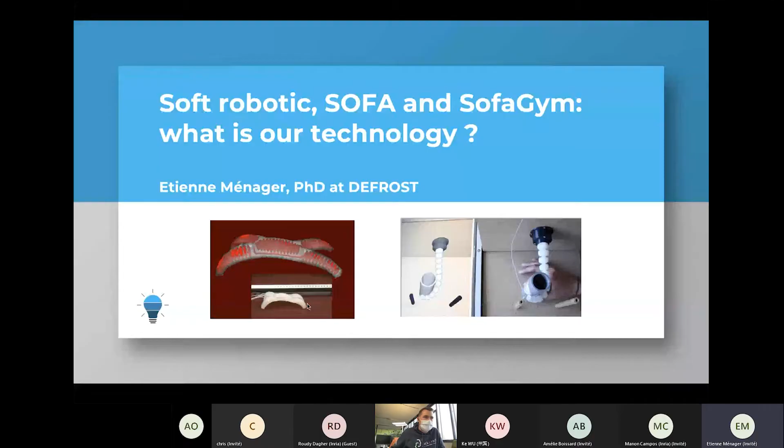Je suis Étienne Ménager, je suis doctorant à l'équipe Defrost et aujourd'hui, je vais vous parler de soft robotique, de SOFA et de SofaGym. Ça veut dire plutôt l'aspect simulation des technologies qu'on développe à Defrost.

La première question qu'on peut se poser, c'est qu'est-ce que c'est la robotique et quels sont les challenges de la soft robotique? Pour ce faire, on va essayer de comparer un petit peu les points forts de la robotique classique et les points forts de la robotique déformable.

Lorsqu'on regarde des robots classiques, on se rend compte que la grande difficulté qu'on a, c'est avec les interactions avec l'environnement. Par exemple, si on a un environnement qui est fragile, les parties rigides de notre robot peuvent endommager cet environnement, et on voit qu'on a des limitations au niveau de l'interaction entre le robot et l'environnement.

Le point fort des robots classiques, c'est qu'il est facile de les modéliser, donc facile de les contrôler. D'un autre côté, on a les robots déformables qui, eux, sont très forts en tout ce qui est interaction. Le corps souple du robot peut rentrer en contact avec un environnement, par exemple, qui est fragile sans le détériorer, mais il est plus difficile de modéliser ce type de robot.

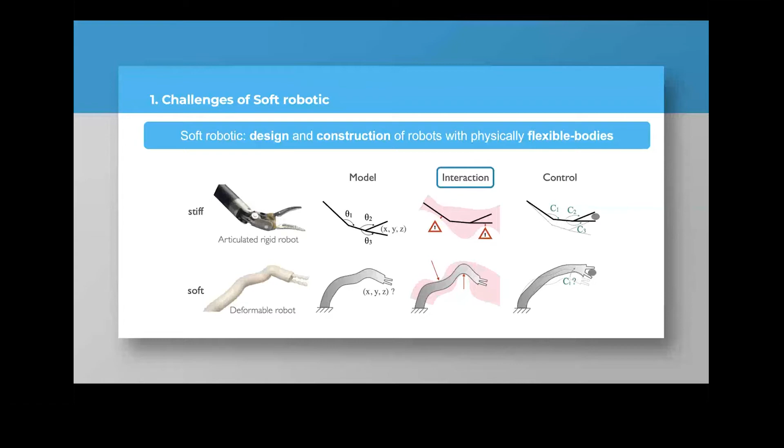Chez Defrost, on s'intéresse à la thématique des robots déformables et on s'intéresse à la modélisation et au contrôle à travers la simulation. Dans une simulation, on a un robot virtuel qui interagit avec un environnement. Et en fait, les outils de simulation, ça nous permet d'avoir des simulations numériques qui sont précises.

Ça veut dire qu'on va pouvoir facilement et avec précision simuler la déformation du robot. Et on va pouvoir également simuler les interactions entre le robot et un environnement qui est déformable ou qui est rigide. La simulation permet de préserver des ressources.

Ça veut dire qu'en fait, on va avoir plusieurs avantages à faire les calculs en simulation avant de passer sur des robots réels. Par exemple, on va avoir l'avantage de la rapidité, puisqu'on a des simulations qui tournent plus vite que le temps réel. Donc on peut faire plein de choses en simulation qui prendraient beaucoup plus de temps avec un robot réel.

On va pouvoir limiter les coûts de développement, puisqu'en fait, on va pouvoir tester nos idées en simulation, tester différentes formes, différents actionnements, etc., avant de devoir les fabriquer réellement et de les mettre sur un robot réel. C'est-à-dire qu'on peut faire nos essais-erreurs en simulation. On a juste besoin d'un ordinateur et de notre logiciel de simulation. Et après, une fois qu'on a tout travaillé en simulation, on peut passer sur un robot réel et donc on limite le coût de développement sur un robot réel.

On peut également faire du prototypage virtuel, et donc ça permet, par exemple, de tester les différentes idées qu'on peut avoir sur des robots souples. Et on peut également tester nos robots quand ce n'est pas possible de le faire en réalité. Donc c'est surtout dans des questions médicales où parfois on veut entraîner un robot, par exemple, à naviguer dans des artères, et donc on ne peut pas le faire sur des patients avec un robot réel.

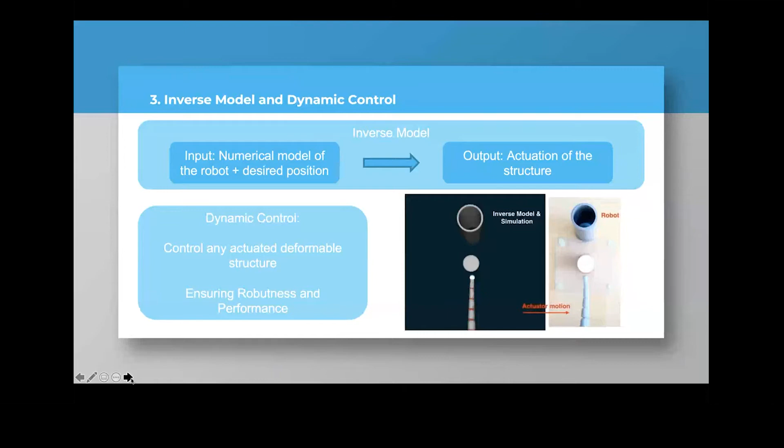On va pouvoir faire du contrôle dynamique, c'est-à-dire que pour n'importe quelle structure déformable qui est actionnée, on va pouvoir trouver un contrôle pour atteindre une certaine position en assurant des notions de robustesse et de performance.

Par exemple, ici, on a un robot qui s'appelle le robot trunk, donc c'est une sorte de trompe qui peut se déplacer, et l'objectif, c'est de suivre la petite boule blanche. À gauche, on est en simulation, et à droite, on a un robot réel. On voit que le robot suit bien la trajectoire donnée par l'objectif, il peut même interagir avec des obstacles. Et ce qui est bien, c'est que tout ce qu'on fait en simulation, on peut le transférer sur le robot réel, et on voit qu'on a le même comportement, que ce soit en simulation ou avec le robot réel.

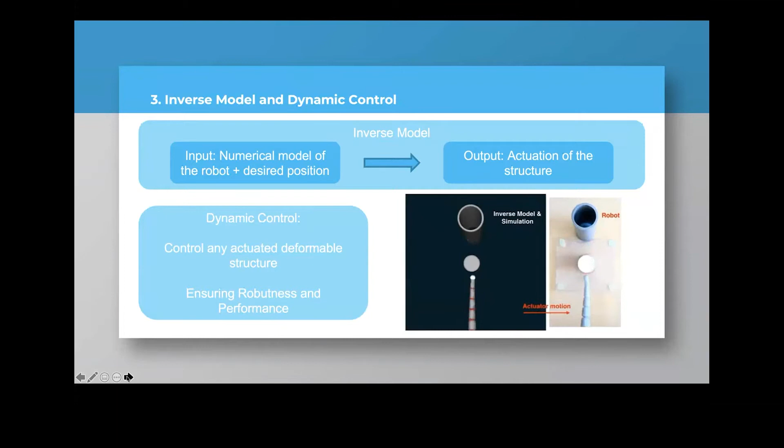Donc, j'ai présenté différentes choses, c'est-à-dire la simulation, tout ce qui était contrôle et inverse. Et ce qui est intéressant, c'est que ces outils ne servent pas seulement au moment où on est derrière notre ordinateur, mais ils peuvent servir aussi lorsqu'on a notre robot réel pour faire différentes tâches. C'est-à-dire qu'ils servent à la fois pour le design du robot, mais aussi pour l'utilisation du robot.

Par design, par exemple, on peut imaginer qu'avec la simulation, on cherche la forme du robot, la taille du robot, on cherche les différentes parties du robot pour atteindre certaines performances. On peut chercher aussi l'espace de travail avec notre modèle inverse, on peut valider des comportements, on peut faire du test, on peut chercher des lois de contrôle.

Et une fois qu'on a designé notre robot, on peut construire le robot et continuer à utiliser les outils de simulation ou de modèle inverse, par exemple, pour nous aider lors de l'implémentation de la commande, pour nous aider à trouver des trajectoires qui sont atteignables par le robot, ou pour estimer la position ou les forces qui s'appliquent sur le robot. Donc, on a ces différents outils.

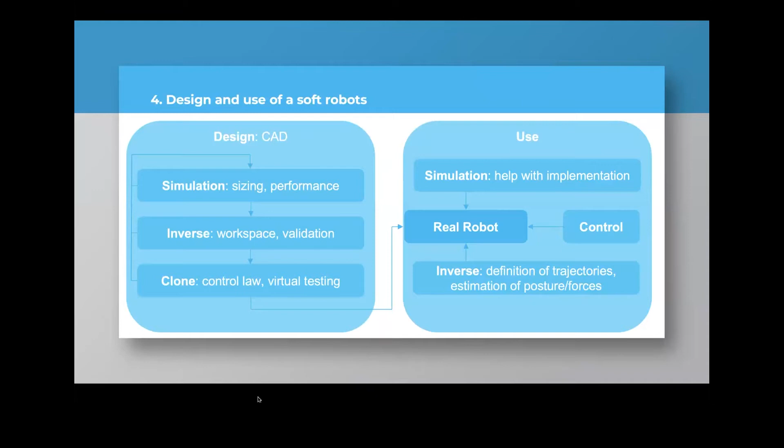Et une application qu'on vient de mettre en place à Defrost, c'est SofaGym, donc qui permet de faire le lien entre intelligence artificielle et robotique. Je présente rapidement deux exemples.

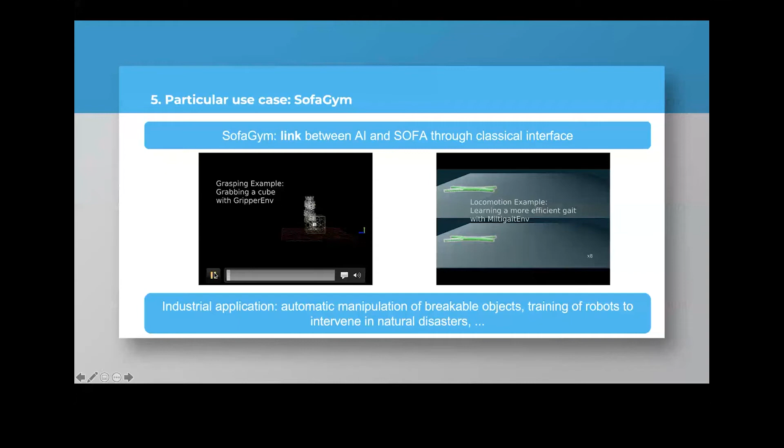Le premier, c'est un robot gripper. Le but de ce robot, c'est d'attraper des objets et de les soulever. Et on voit que le robot apprend par lui-même à réaliser cette tâche. C'est-à-dire qu'on a notre robot, on a zéro commande, et on lui dit juste attrape le cube et mets-le à une certaine hauteur. Et petit à petit, le robot apprend par lui-même à résoudre cette tâche.

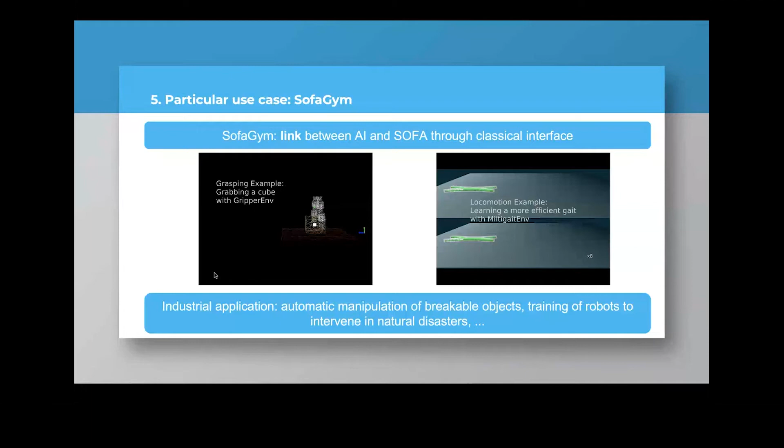Le deuxième exemple, c'est un exemple de locomotion. En haut, on a une commande qu'on a définie à la main. On veut que le robot se déplace au maximum horizontal. On voit qu'on peut faire une commande à la main, mais elle n'est pas forcément optimale. Et en fait, le but aussi de l'intelligence artificielle, ça peut être de chercher une commande optimale. Et donc, on voit ici que la commande qu'on a appris, elle permet d'aller beaucoup plus vite pour se déplacer au max X. Donc ici, c'est deux exemples un peu jouets, disons, qu'on a dans l'équipe, mais on peut imaginer différentes applications industrielles.

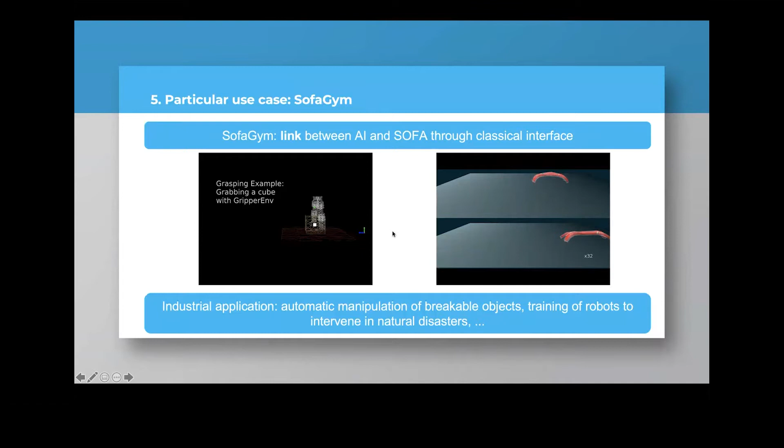Par exemple, la manipulation automatique d'objets fragiles, puisqu'on a vu que les robots souples sont très bien designés pour interagir avec des environnements qui sont fragiles, qui sont souples, ou comme par exemple les tissus humains. Donc, on peut imaginer un robot qui va apprendre par lui-même à manipuler ce type d'objet.

On peut également imaginer la locomotion d'un robot qui va apprendre par lui-même à intervenir lors de catastrophes naturelles. Par exemple, si on a un tremblement de terre avec un bâtiment qui s'est effondré, on peut avoir un robot souple qui peut se faufiler dans les débris et intervenir pour différentes tâches qu'on lui a fixées.

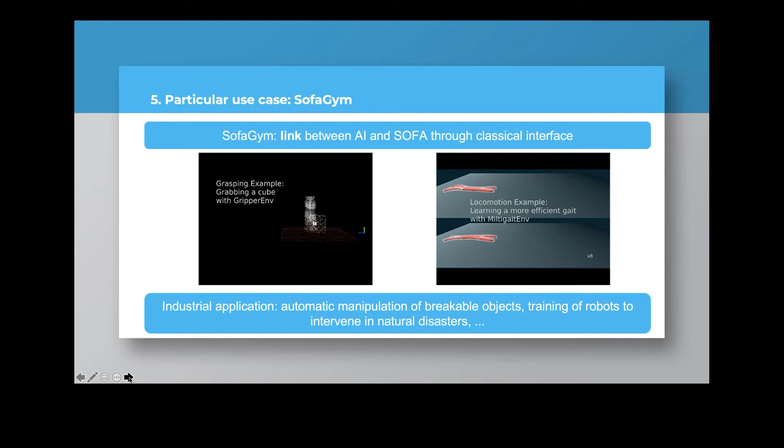Un autre exemple, c'est le transfert d'apprentissage. Ça veut dire qu'on peut faire du design et du contrôle en simulation à l'aide de l'intelligence artificielle, et ensuite appliquer ce contrôle sur un objet réel.

Ici, on a un labyrinthe qu'on veut chercher à résoudre avec l'intelligence artificielle, et ce labyrinthe, il est actionné par un robot souple, et donc le robot apprend par lui-même à résoudre ce labyrinthe. Dans notre exemple, on veut amener la balle qui est en orange ici, dans le coin supérieur droit.

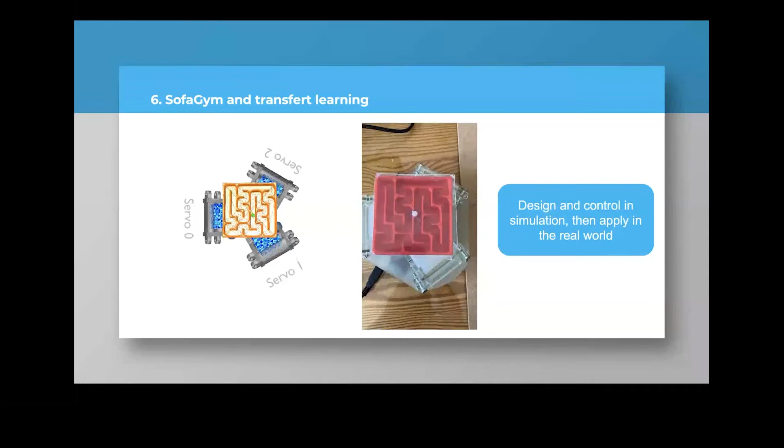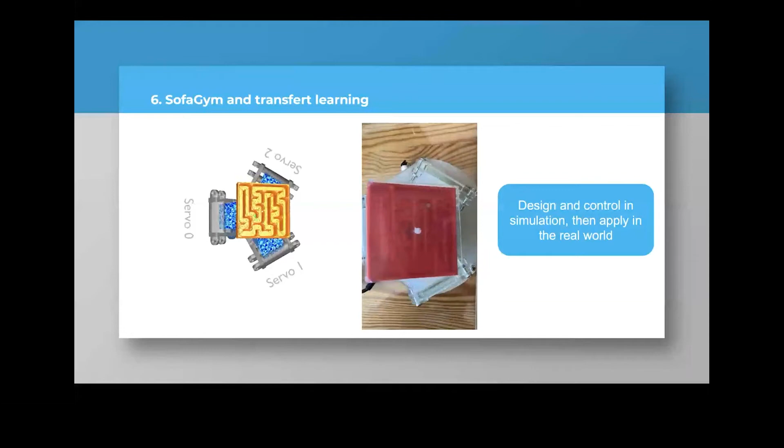On peut se rendre compte que lorsqu'on applique la stratégie qu'on a trouvée en simulation, on peut résoudre également le labyrinthe réel. Donc on voit ici qu'on est en boucle ouverte, ça veut dire qu'on n'a pas de retour de la réalité. Donc on peut avoir une petite différence entre simulation et réalité, mais il est tout à fait possible d'imaginer faire le contrôle en boucle fermée, c'est-à-dire avoir un retour du robot réel.

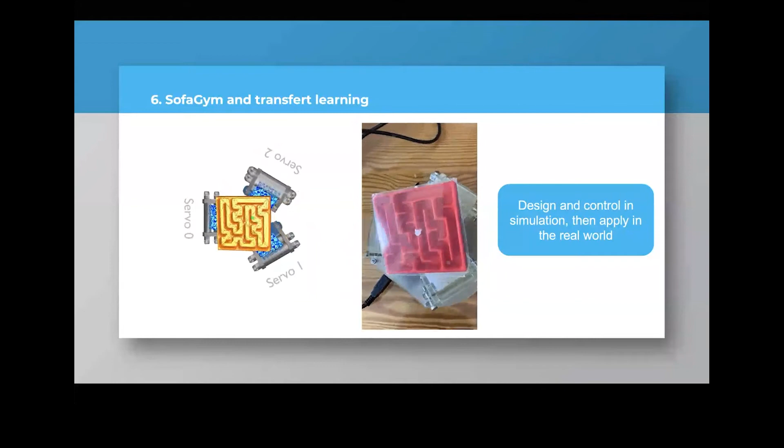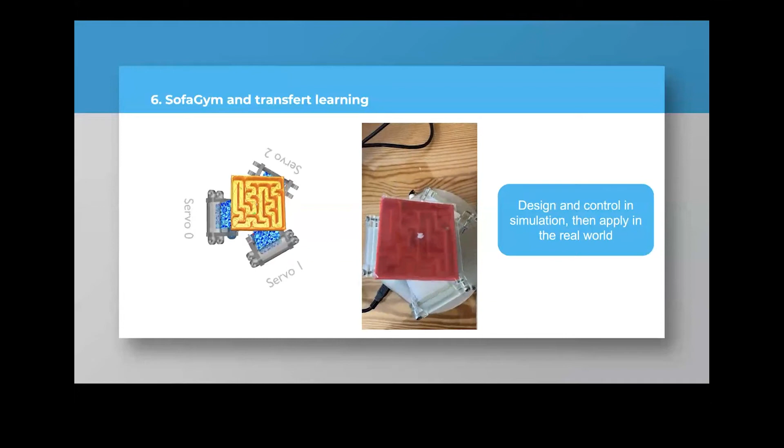Là on voit que petit à petit, on arrive à résoudre notre labyrinthe et on apprend à amener, par exemple, dans le coin supérieur droit. Donc là, par exemple, on a vu une différence entre simulation et réalité, mais finalement on arrive à atteindre la position finale.

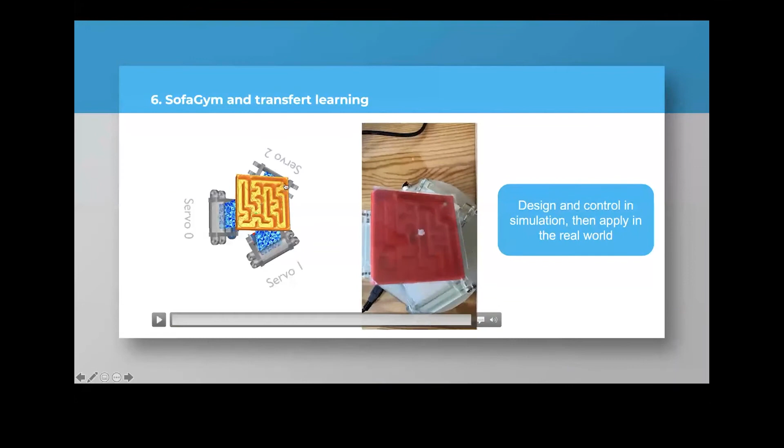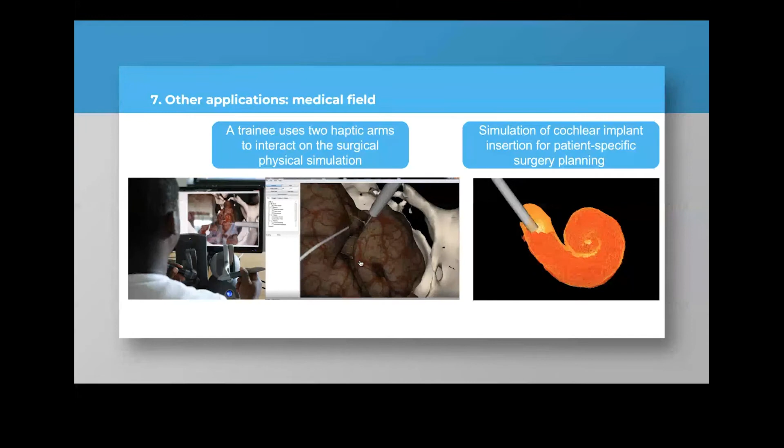Un autre exemple qui n'a rien à voir avec l'intelligence artificielle, mais qui est un bon exemple d'application de la simulation, c'est l'apprentissage médical. Ici on a quelqu'un qui apprend à faire des opérations à l'aide de deux interfaces haptiques. Il va contrôler deux outils dans la simulation qui interagissent avec des organes. Et si on a une simulation qui est fidèle, ce qui est plutôt le cas avec SOFA, ça permet d'avoir un bon taux de feedbacks qui sont transmis à l'apprenant via des interfaces haptiques. Et donc on peut s'entraîner sur des opérations sans avoir besoin d'avoir du matériau organique en face de soi.

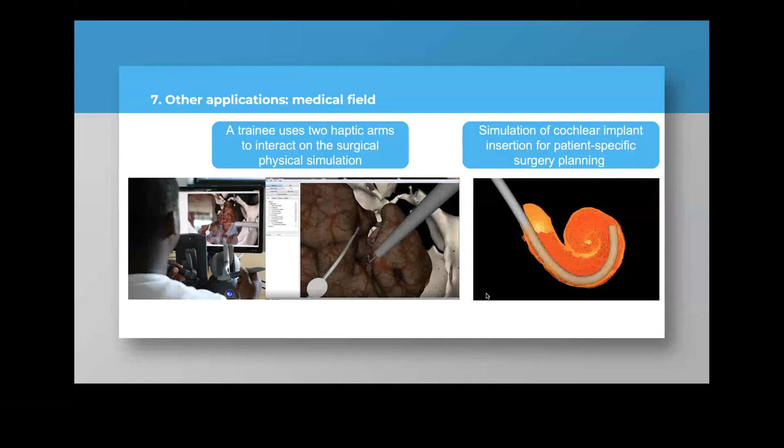Un autre exemple, c'est le planning d'opération. Ici on a l'implant cochléaire, donc c'est une opération qui vise à amener un tube dans l'oreille. Et du coup on peut imaginer prévoir l'opération en simulation avant de la réaliser en réalité. C'est un peu tout pour moi sur cette question.

Mais je voulais conclure en disant pourquoi choisir SOFA et la soft robotique. C'est parce qu'il y a beaucoup d'applications dans de nombreux domaines : on a vu le domaine médical, la locomotion, la manipulation, l'apprentissage. Ça peut être aussi le gaming, si on veut par exemple avoir une interface fidèle physiquement. La deuxième raison, c'est parce qu'on a des outils qui sont fonctionnels et open source, c'est-à-dire qu'on a une grande communauté. S'il y a le moindre problème, on a toujours des solutions et tout est gratuit.

Et un point qui est intéressant, c'est qu'on passe du monde numérique à la réalité avec des robots qui peuvent interagir avec le monde extérieur. Merci pour votre attention.

Juste une question, par exemple, sur le robot que vous avez créé qui permet de résoudre le labyrinthe. J'imagine que le robot doit s'entraîner pour trouver une solution. Et est-ce que c'est long, et combien de temps ça prend à peu près selon la complexité du problème que vous avez ? Alors là, on a utilisé des techniques de planning.

Donc c'est plutôt court parce qu'en fait on utilise la simulation comme modèle du monde extérieur. Du coup là, c'est pas très long pour apprendre ça. Et la chose qu'on a fait avec le labyrinthe, c'est qu'on a couplé à la fois intelligence artificielle et les outils inverses qu'on a avec l'équipe Defrost. C'est-à-dire qu'en fait on va juste chercher à trouver l'orientation du labyrinthe qui permet de résoudre petit à petit le labyrinthe. Et après, à partir de cette orientation, on l'utilise comme commande d'un modèle inverse qui permet de trouver la commande de moteur qui nous permet d'avoir ces orientations. Donc c'est pas très long parce qu'on a un espace réduit de paramètres.

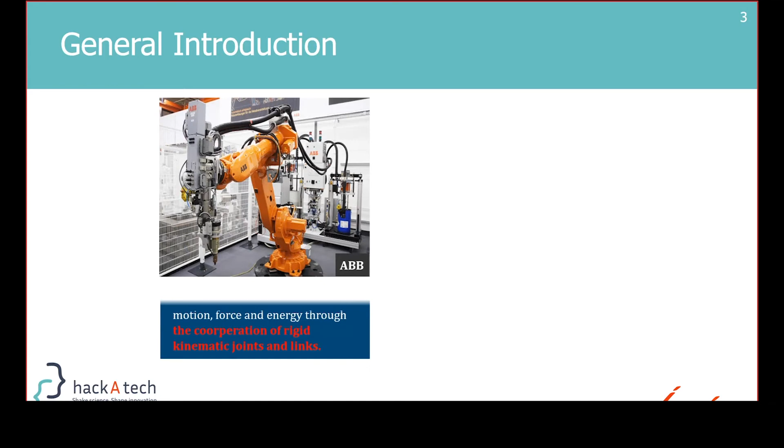First of all, I will briefly introduce you to the concept of robots and their classification. We've got the conventional rigid robots, this is the rigid arm robot from ABB, a very famous robots company. This type of robot can transfer motion, force, and energy through the cooperation of rigid kinematic joints and links. They've got high speed and accuracy, high stiffness for load bearing, and they work well in highly structured work environments.

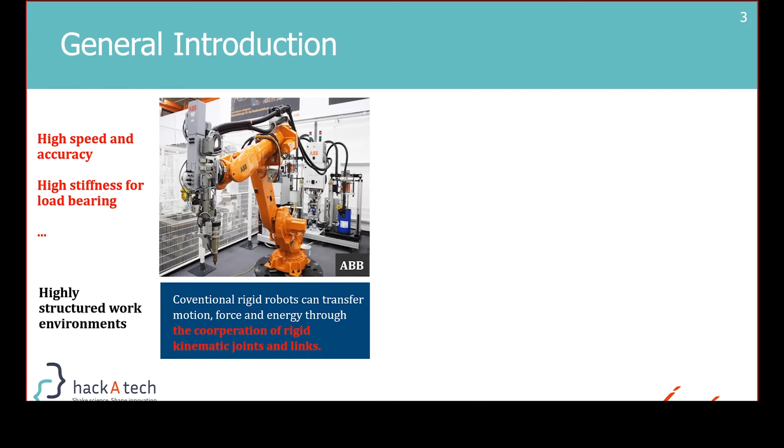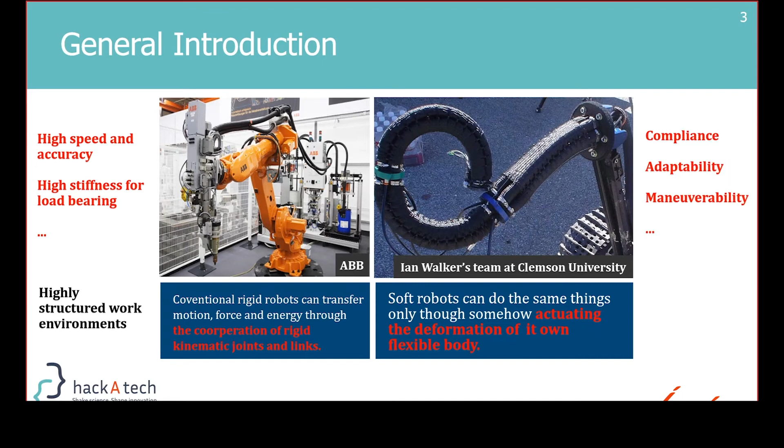And also we've got the soft robots, or you can call them continuum robots, like the one I'm showing you on the right-hand side. This is a soft trunk robot from Ian Walker's team at Clemson University. They can do the same thing, transfer motion, force, energy, but only through actuating the deformation of its own flexible body. This type of robot has compliance, adaptability to unknown environments, and maneuverability, and they are more suitable for unknown environments or scenarios where safe human-robot interaction is needed.

For the moment, in the field of soft robotics, we mainly have three challenges here. The first one is they are very hard to model, they are very hard to control. The second one is they normally move slowly, and the motion of them is not very accurate. The third one is they are sometimes too soft to bear or resist any mechanical disturbances.

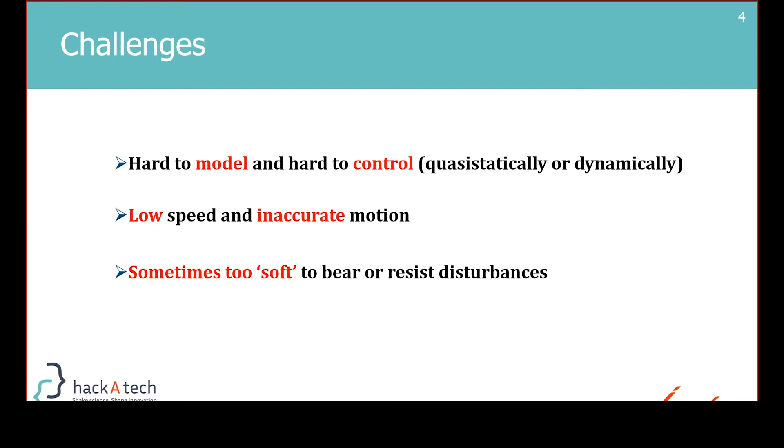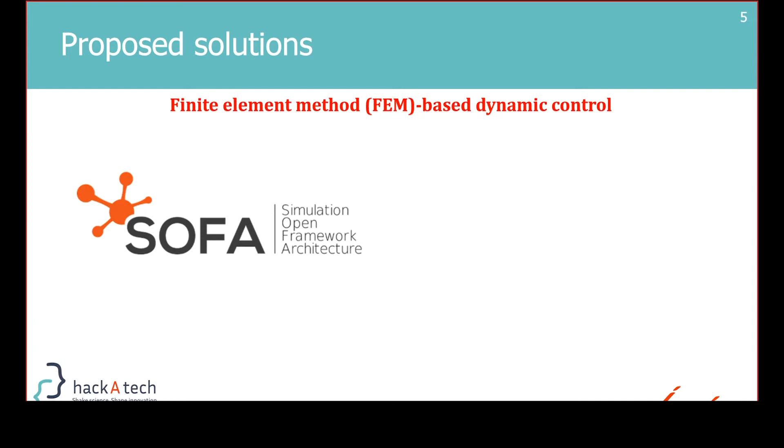So in terms of these challenges, we've got some solutions. In our team, we have an open source simulation software called SOFA, which is dedicated to modeling deformable bodies using finite element method. In my work, I use SOFA to model the studied trunk robot, and based on the model, we developed a FEM-based controller to achieve dynamic control. I'm going to show you the video.

The first part is trajectory tracking using the dynamic controller. You can see the end effector of the trunk is tracking a sine function here in the space.

The second part is about the robustness analysis under temporary disturbance. Actually, the trunk is disturbed by a pen. You can see the trunk can stably trace back to the trajectory, and it works well.

The third part is also robustness analysis, but under permanent disturbance. The trunk is actually carrying an extra piece of rubber on its body, and you can tell it also works well in this case.

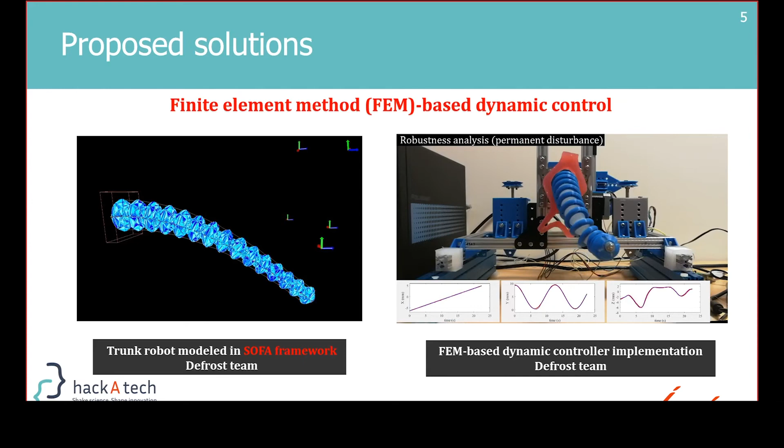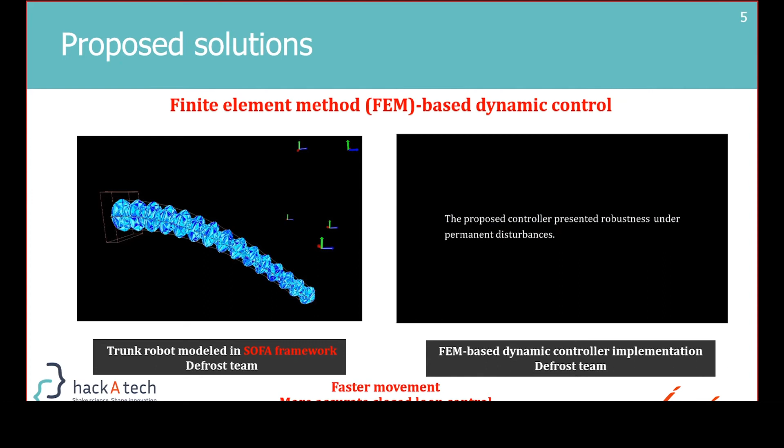So using this proposed method, we can achieve faster movement and more accurate closed-loop control. So in terms of...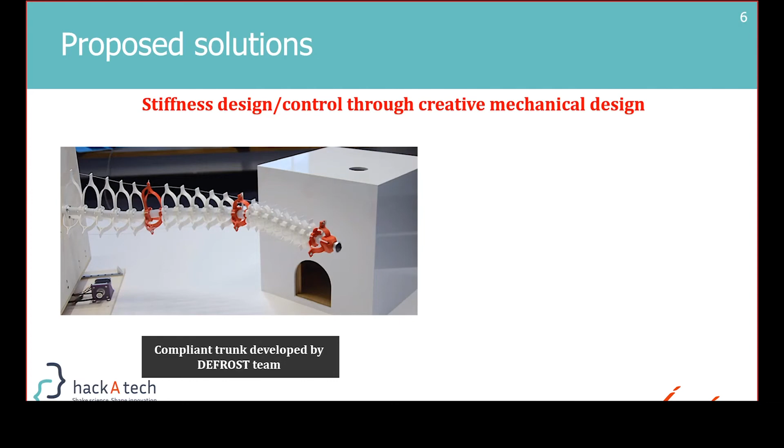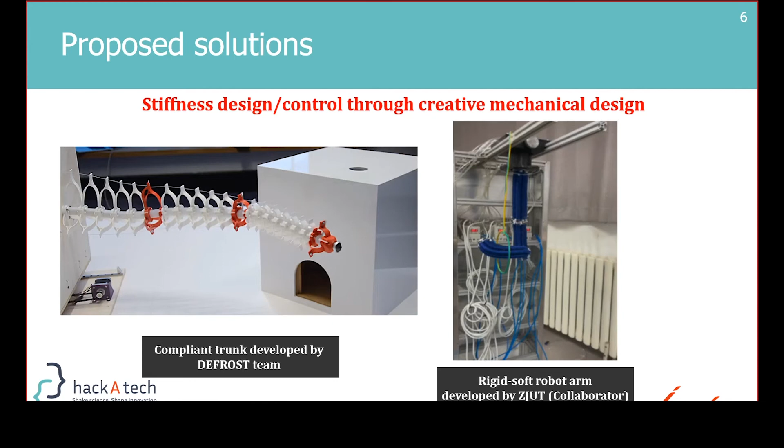You can see here, the picture on the right-hand side shows a rigid soft robot arm developed by one of our collaborators, Zhejiang University of Technology in China. They combine the advantages of soft robots and rigid robots together to create a stiffness adjustable robot. That means the robot can change its stiffness while operating, which means sometimes it can maintain very high stiffness to carry heavy payloads, and it can also transform into a very soft one to provide safe human-robot interaction.

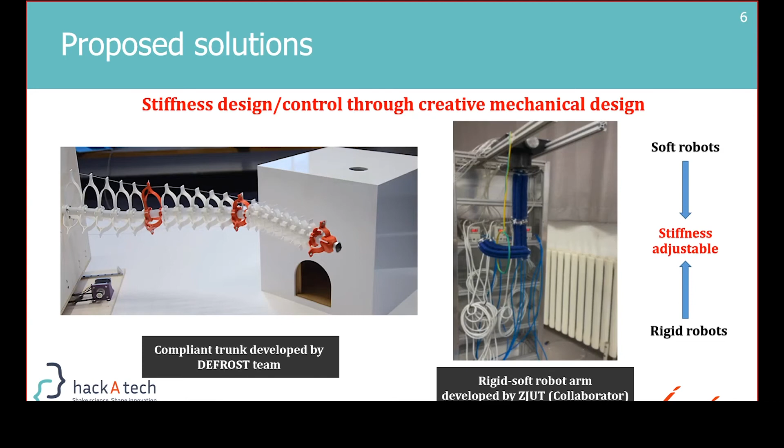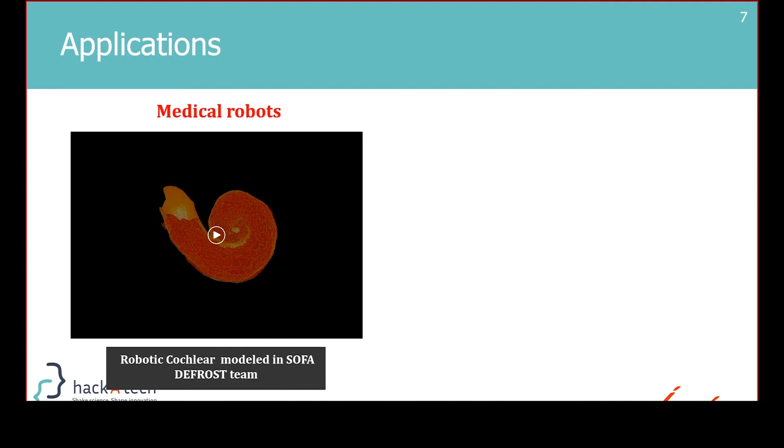Next, I'm going to be talking about some applications of soft robots. Of course, like Anton mentioned, it can be used in healthcare. This is the video I'm going to show you about robotic cochlea. This is modeled in SOFA. So the function of it is to help patients to listen better.

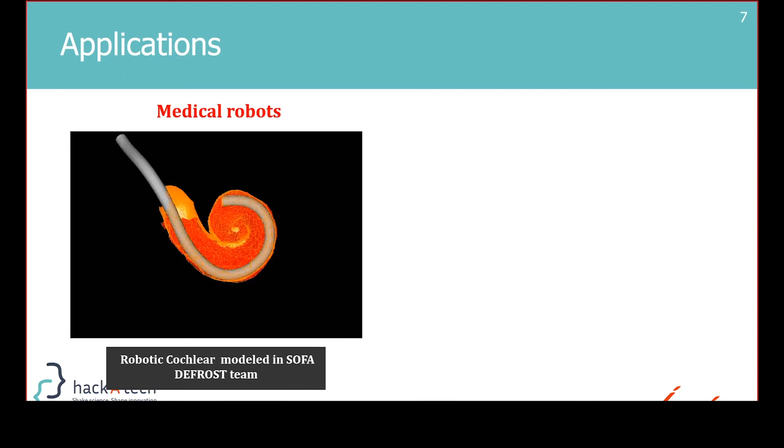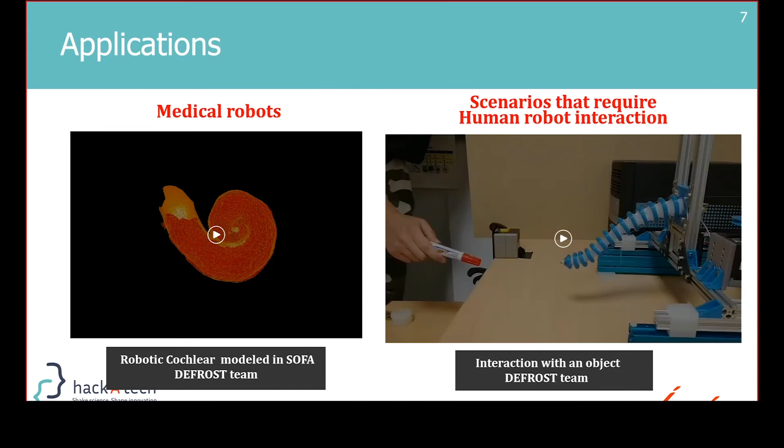And the second one I'm going to show you is that the robots are also applicable to some scenarios that require safe human-robot interaction, just like the interaction with an object or with people. I just did a very little test on my robot. I can see the trunk robot is trying to grasp the pen.

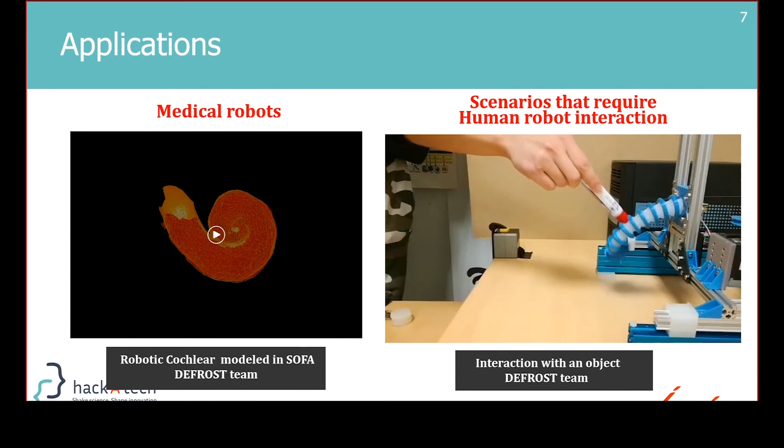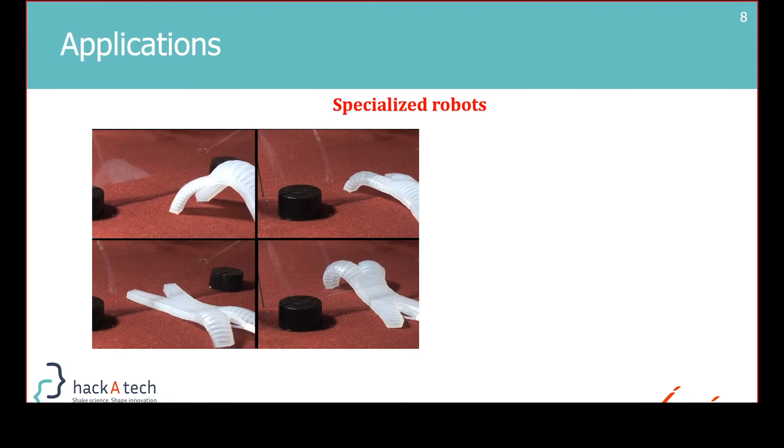And then soft robots can also be used as rescue robots to explore some unknown and complex environments, just like the one I'm showing you on the left-hand side. It's a pneumatic reptile robot for complex environments. This is from Harvard, and we also model it in SOFA. Based on simulation, we can decide what to change, what to optimize in terms of the topology or the geometry of the robot.

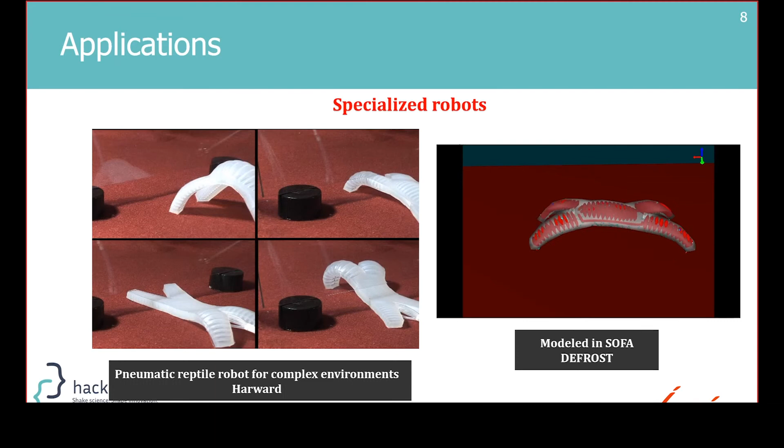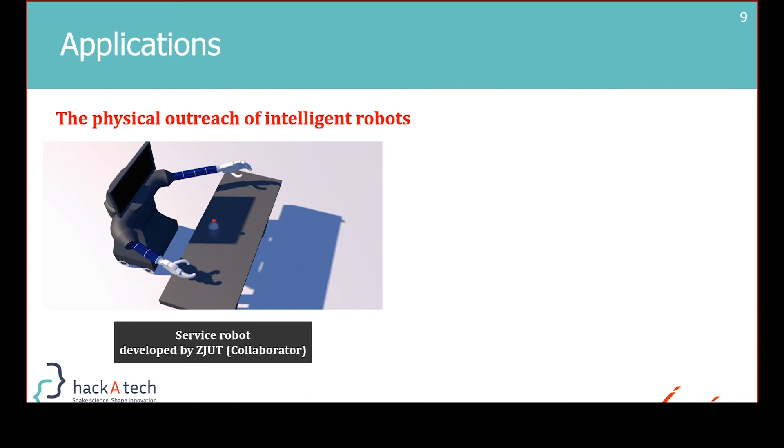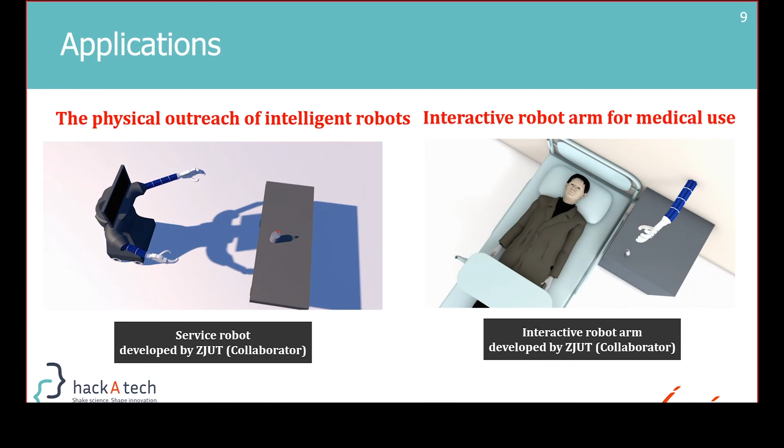Soft robots can also be used as a physical outreach of some intelligent robot for safer human-robot interaction. This is also from our collaborator ZJUT in China, and they can serve as an interactive arm for medical use. For example, during the hard time of COVID-19, there was a shortage of medical personnel almost everywhere in the world. They can be alternatives to serve patients and sometimes protect doctors and nurses from directly facing patients in dangerous and contagious environments.

The next one I'm going to talk about is the Volkswagen mobile charging robot. This is a conceptual product design of a Volkswagen mobile charging robot for vehicles. You can see the picture on the left-hand side. They actually use a conventional rigid robot as the physical outreach, however, our collaborator proposed using a flexible arm for the same application scenario.

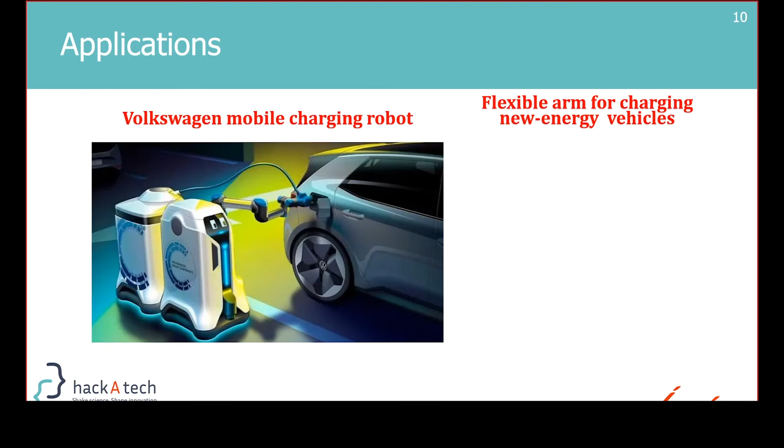So first, the trunk is looking for the hole, and then it goes into the hole, and then charges the vehicle, and goes back to the rest position.

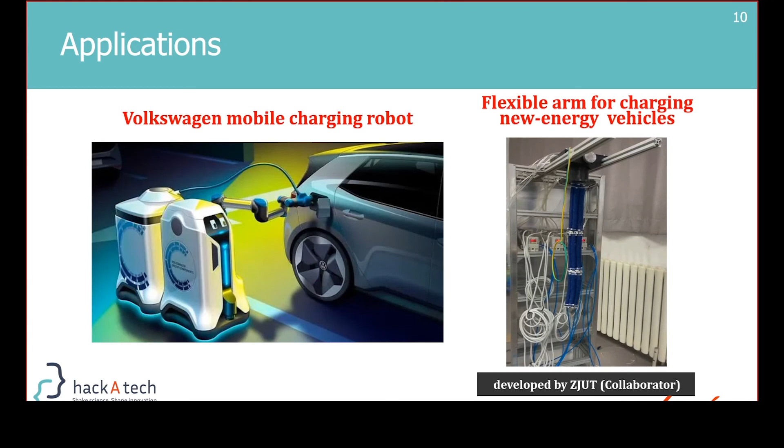So the last part I want to mention is that in the field of soft robotics, we're facing so many challenges, and we all know that challenges are always along with opportunities. For example, modeling and control methods, the manufacturing process, the actuation, creative design, or even the integration of different frontier technologies. So there's a lot to do and a lot to think about.

I'm sure this is going to be a very promising future, either in academic research or the business world, because this field has been attracting more and more talented researchers, and more people from academia and markets are getting interested in this field. And that's pretty much about my presentation. Thank you for your time, and thank you for bearing with me. If you've got any questions, you can ask me, I would be very happy to help. Thank you all.

So I have one question for you, Kay. Is there any difference in terms of cost to produce soft robots compared to classic robots, because of the materials you use or the time of development? Is there an advantage in terms of cost using soft robotics?

Do you mean price? Oh okay, the price, the expense, right? Cost, yeah. Okay, so I think it could be much cheaper than conventional rigid robots because we're actually using silicone. I'm not quite digging into the market of this area, but from my experience, it could be cheaper.